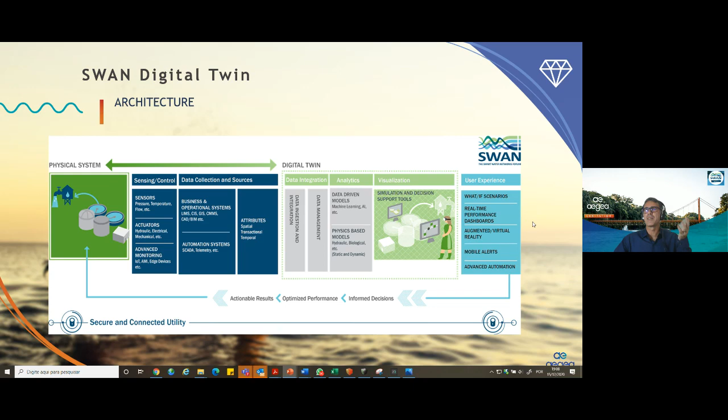You see this in a practical vision of our facility. Data integration as well, it's so important. Analytics, asset information that can offer better results in optimization, organization, for user experience in a virtual world, augmented reality as well.

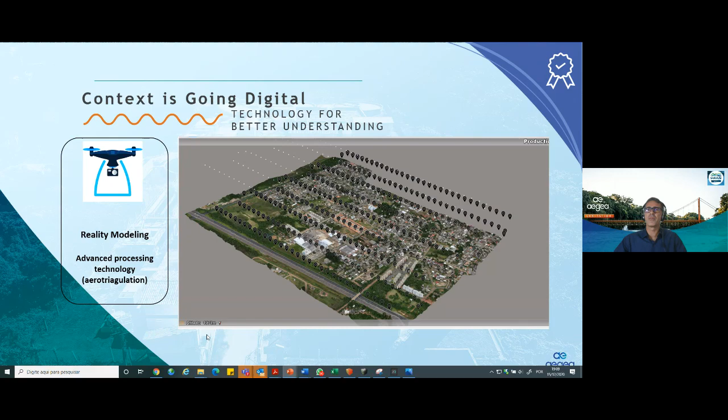So the context, how to digitalize the context, the physical assets, the sites. In this part, I'd like to highlight that we are using advanced drones and processing technologies. These are just an example of one of our sites. It's amazing the color, the details that we can capture using this high resolution data and images, and we generate these 3D models.

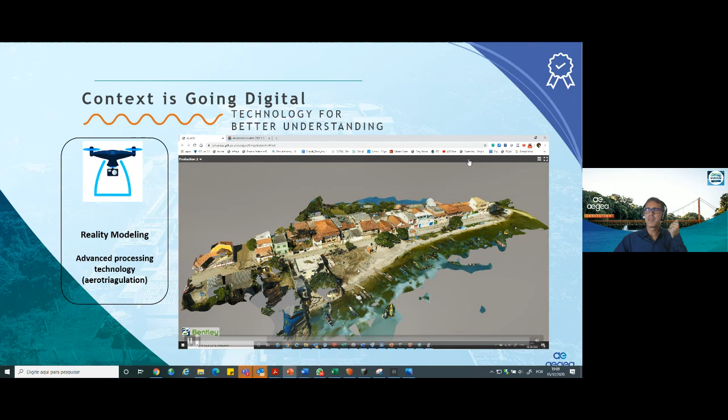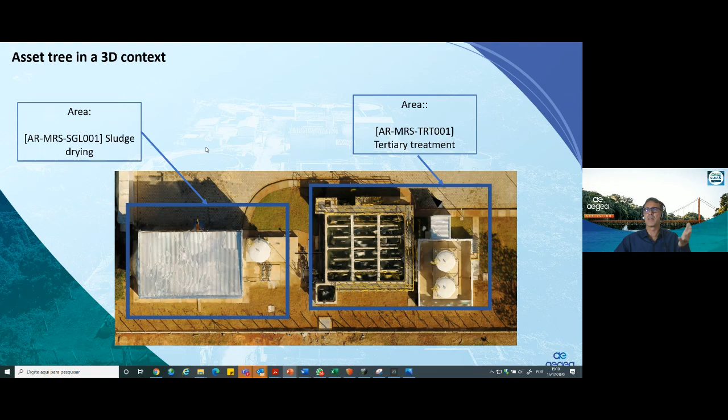The asset tree in this context, how we organize our organization, the information requirements in our organization at different levels of this tree, from the plant. In this context, we split into areas from different functions: sludge drying, tertiary treatment, till the equipment. And it's amazing to see the attributes, the volume, the historical data, the condition of each asset.

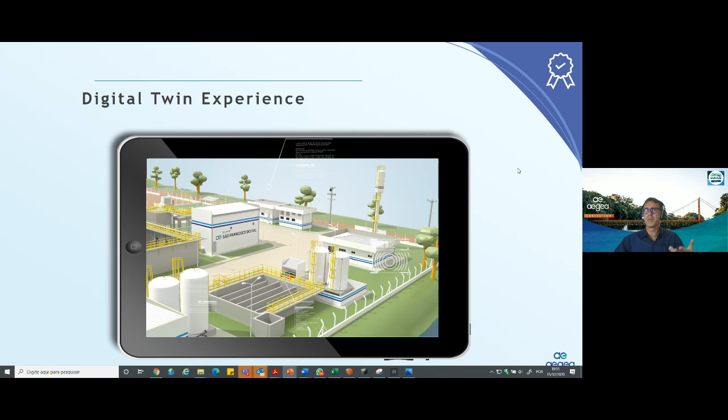In this amazing context, combining BIM, Building Information Modeling, and DT, Digital Twin, it's amazing that this cross-platform we are able to use even in the field, the iPads, to see the data. And in this part I just show you the technology that we use in this particular plant.

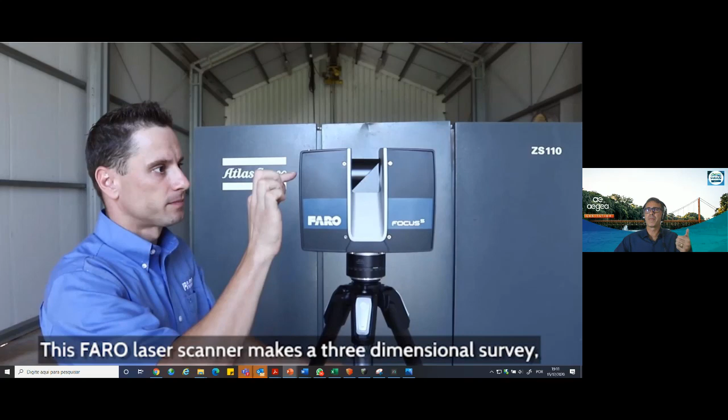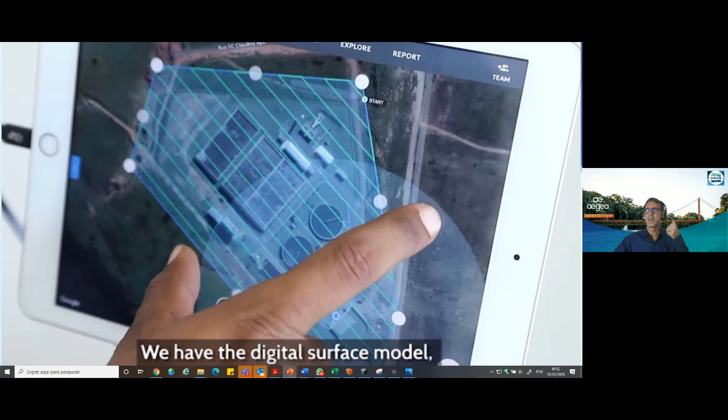The information will be accessible for anyone, anywhere. We use laser scanning to capture millions of points per minute to do this survey. We have a wealth of information to take to the software. We capture the digital surface model, the digital assets, we can digitalize our assets as well. The principles of topography, aerophotogrammetry are used as well.

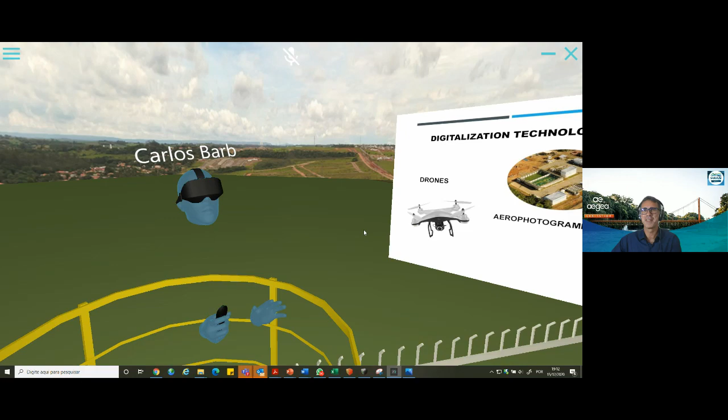So let's go to the field. Let me introduce you to our colleagues. Carlos, can you see me? Now we are inside the plant. Hi, how are you guys? I'm here. Perfect, Carlos is the CEO of the EXA project. Carlos? Yes, okay, it's my pleasure to be here with you guys. I just lost tracking of one of my hands, but no problem.

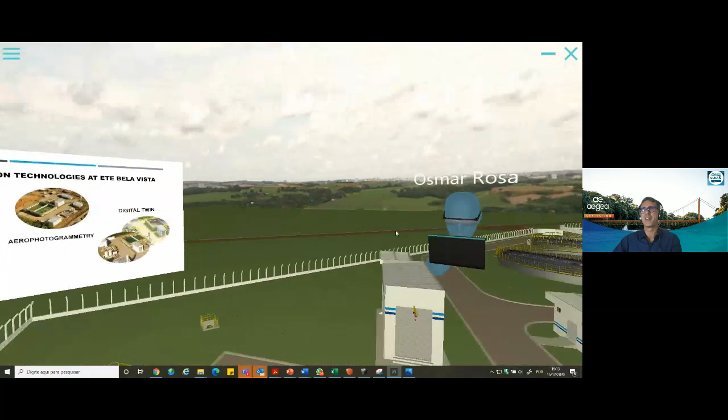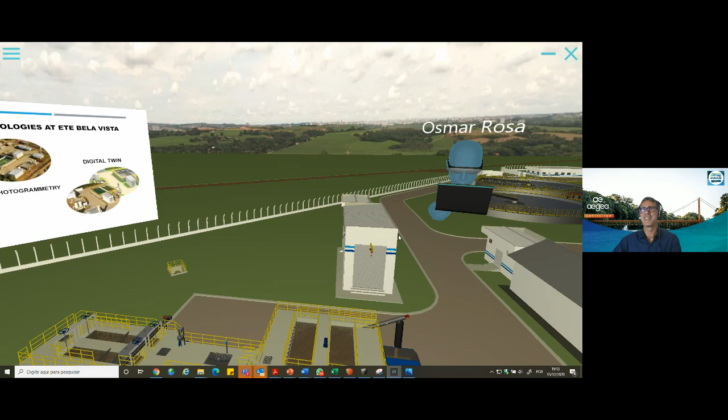Let's go ahead. And our colleague Osmar is my colleague in Aegea, is part of this team. Osmar, can you hear us? Yeah, I hear. Wow, perfect, Osmar.

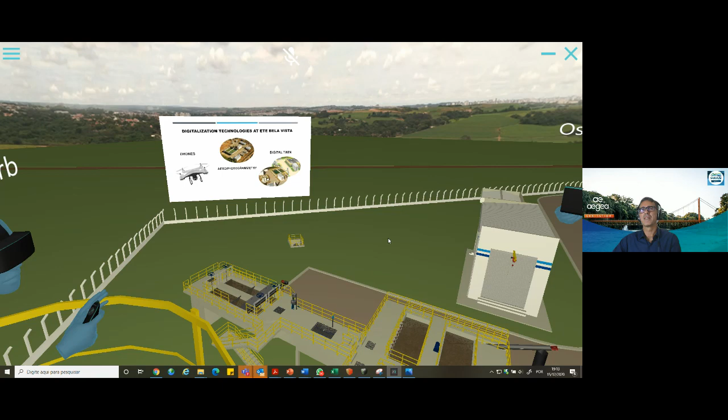It's important to mention that we can do it later if anyone can, we can offer this opportunity. So, but if people had the VR glasses, they could have downloaded the app, and then they could be here as an avatar, just like Carlos is now, touring this site. Brilliant.

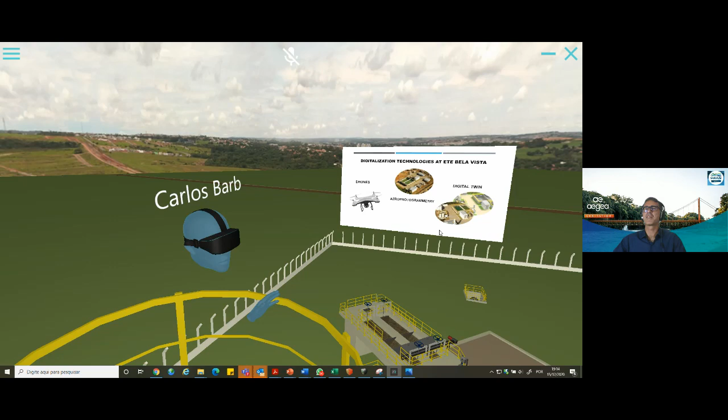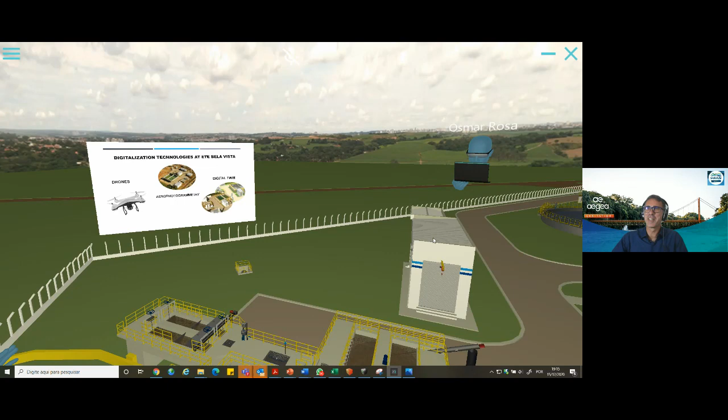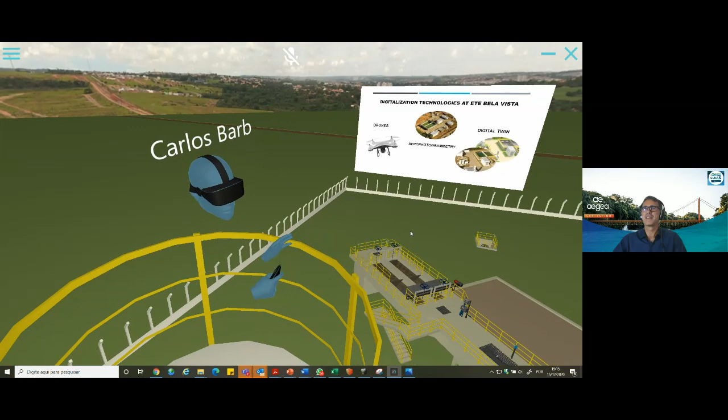Wow, it's great to hear that everybody outside can see us. This vision from the tank is amazing. I'm using the notebook, and Carlos is using the VR glass. For Carlos, the immersive experience is even more real, it's a lot better. And it's worth mentioning that anyone with an iPad could also be sharing the experience with us, even on the actual site, at the wastewater treatment plant.

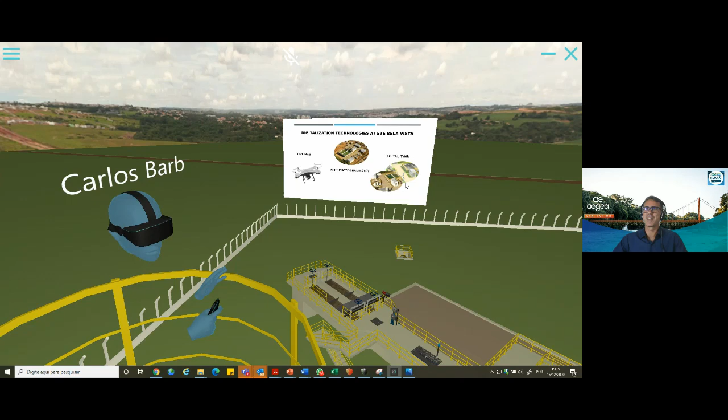This pop-up, I just want to highlight for those not so familiar with digital twin, is the replica in detail of our plant. If you go to the plant right now, you'd see this exact view.

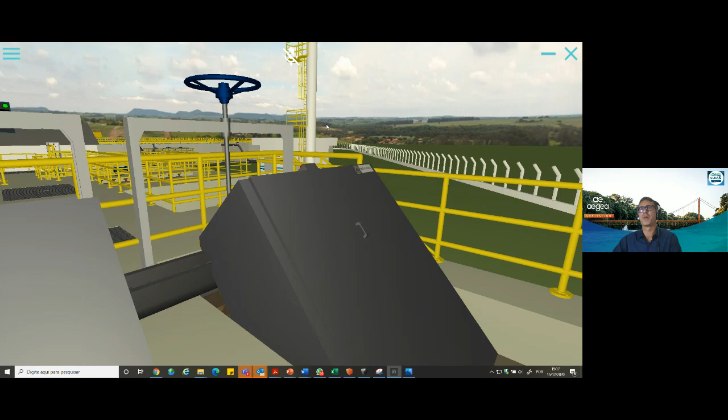So let's begin with the preliminary treatment. Cadu and Osmar are here with me, we are beginning our tour. Everyone can see we have tags on our equipment because over the last 3 years we've been managing these equipment based on the QR code and the historical data, asset information, and verification. All the historical information you can see here - when we bought it, how much it cost, how we installed it - many kinds and types of attributes are correlated with this equipment.

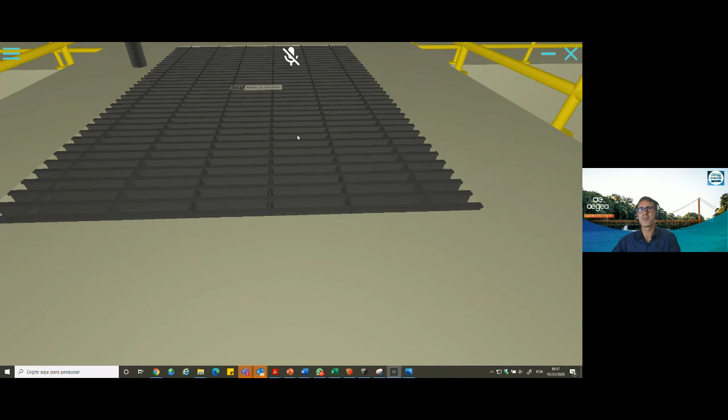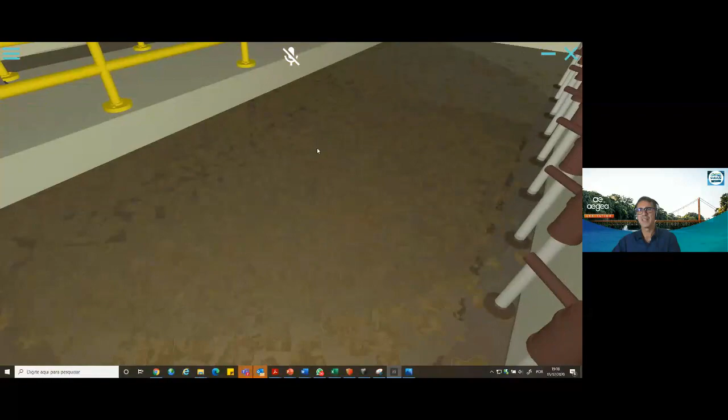Let's go to this part - we can see the flow, the real-time flow. It's communicating with our SCADA. Right now it's the flow that we are receiving in this plant. It's amazing because we don't have limits, no restrictions. We can even see the animation of the raw sewage. It's very interesting because in a physical, in-person visit, you cannot have this kind of view under the preliminary treatments or the effluent.

Even the grit removal system, as Marco said, it's impossible to have this kind of experience in the real world. I can guarantee that it's safer here. Yeah, for sure.

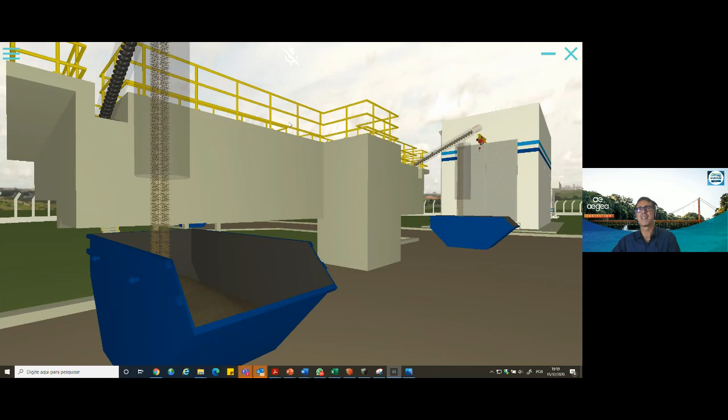So Wagner, it's Piers here again. We're getting a couple of questions which I know you can't see because you're on the screen. Are you okay with me throwing them out to you as you do the tour, or would you prefer to wait for the end? Sorry Piers, can you repeat? I was saying we're getting a couple of questions - would you like me to ask them now, or wait till the end, what would you prefer? Well, I think it's okay to answer now, it's more friendly. Yeah, that's what I thought, I just wanted to check.

So the first question that's coming is: is the QR code tag metal or a plastic label? This is looking at - you've got this asset register of data and where you're reading that data from - is it a metal tag or plastic? Metal. In Portuguese we say inox - stainless steel.

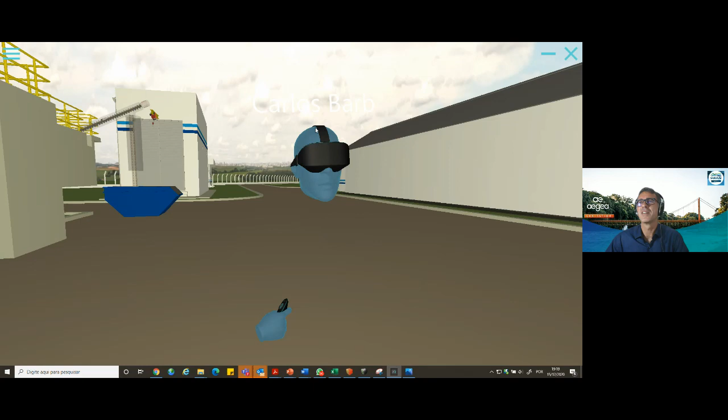There's a technical question - we'll knock all of these off while we're doing this. What VR compatibility does this have? The person who's asked that has got a Quest 2 and an HTC Vive at their disposal - would either of those work with this? Yes, HTC Vive is okay, but right now the Quest is under development. Even HoloLens is under development, but it's a matter of maybe a couple of weeks - we're porting to Quest, because it's more portable. Quest is a very good device.

Brilliant, all right. And then two sort of broader questions. One is, what was the main driver for investing in this - what was the investment thesis for Aegea to create this digital twin? And then I'd also like to ask a question around simulations - you've created this virtual sewage treatment plant, can you run simulations on it, or what degree of simulations can you do with this? Can you just change flow, or can you change wastewater strength for example? So two questions there - sorry, I'll do the one. What was the main driver for investing in creating this digital environment?

Well, the main driver was, after we increased our maturity level in asset management, the trigger was our Building Information Modeling methodology joined with our asset management guideline over the last 3 years. Now we are increasing our reliability to create this environment and explore the benefits. The main driving was for training, to support our operation and maintenance team, and even for presentations. Over the pandemic, over the last 6 months, we are even exploring meetings inside this environment.

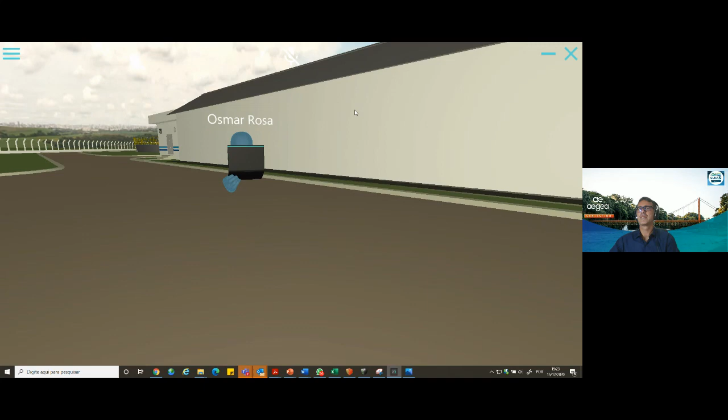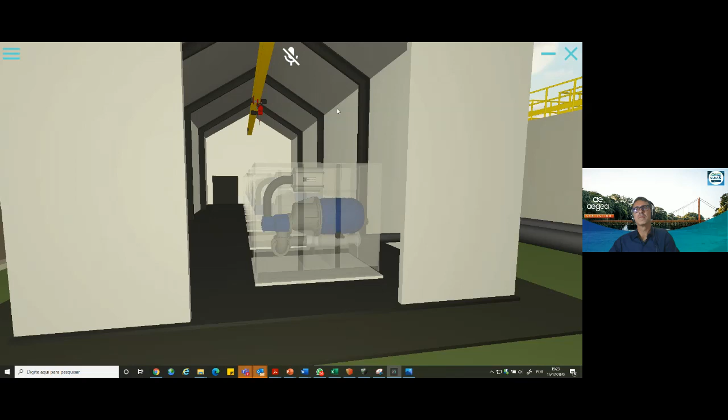And we have a long time of historical data that you can use, for example, to make prediction and simulation for a specific machine, like a centrifuge or a blower. For the process itself, you're talking about process data, and we are developing a mathematical model with AI to have the correlation between all process data itself, which is parallel to the data you're having here, the data from a machine.

We can make prediction and simulation of this specific machine, but for the entire process we are developing it further. For example, changing not only the flow of the plant but also the quality of the raw wastewater, and see what is going to happen, creating as many scenarios as you need. But I'm referring to the process - for machines, you can make predictions and simulations, and it helps a lot for operation and maintenance.

If I can summarize a little bit, they're getting this massive amount of data and processing it, and I think this platform is a great way to visualize that. It's a lot more ergonomic than seeing the data flowing on charts. So in here, the data is spatially distributed - I think it's a revolution in terms of ergonomics.

Yeah, no, it looks brilliant. And the question that Peter Williams raised, he built on it saying - I think it was from Peter Williams - can you model the impact of rainfall? But based on your answer, absolutely, it sounds like you can, as long as you've got the right meteorological data, you can make adjustments to the flow coming in.

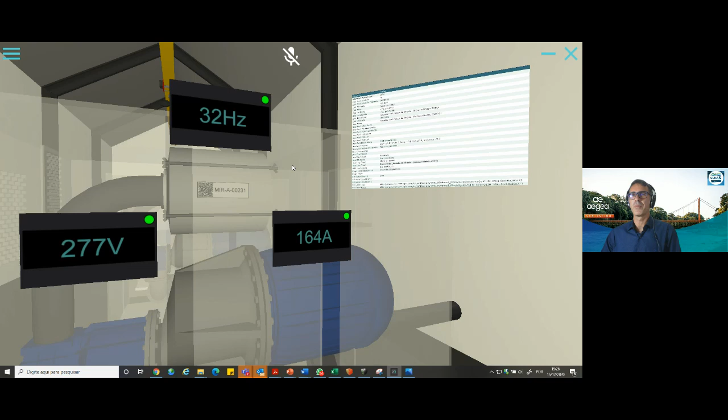Well, absolutely great questions, I'm very happy to hear that. Yeah, it appears fantastic, but I'd like to highlight that this platform doesn't compete with other specialist platforms for hydraulic simulation or rainfall modeling. In this interface, in this environment, we can see in an ergonomic way, have this more ergonomic visualization. Cadu, Osmar and Marco talked about the historical data, real-time data, and even simulation data - we can gather all these perspectives, different disciplines, in the same environment.

Yes, for sure, and also the predictions can trigger, for instance, a maintenance process. So beforehand, we can have a maintenance process that can help people create maintenance on the machine before anything really catastrophic happens. This is very important also, to keep the health of our assets.

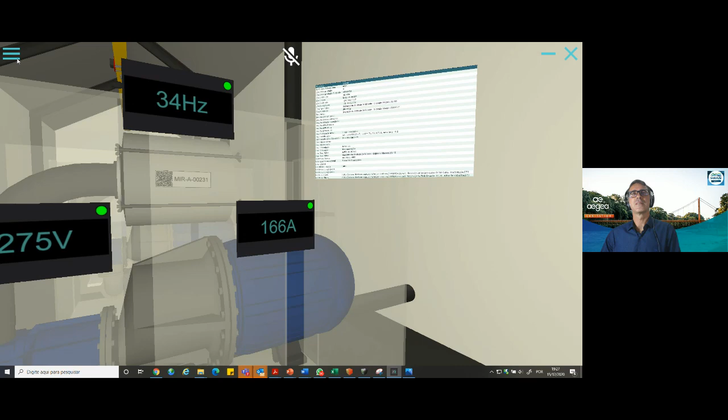Well, like you say, the tool was developed so that you could do better asset planning and better asset management. So again, another interesting question around greenhouse gas emissions. Obviously a wastewater treatment plant is a source of immense amounts of greenhouse gas emissions, both from the secondary treatment plants and from the sludge treatment end. Does your model at the moment look at that, or is it mostly focused on treatment and hydraulics? Or do you measure the GHG emissions?

Oh, the next step, yeah Piers, yeah, we can join this perspective. Fantastic question - imagine correlating this kind of data, this information, with the operation vision, with the operation perspectives, it will be amazing. Yeah, we already have some interaction about these advancements, yeah, towards this circular economy.

Yeah, this part is fantastic. We have some videos - I will not put this video in, but we have some video that we can offer for our team to see how this process works.

Just yesterday you made a very interesting test with Osmar. Osmar had the virtual machine on his table and could see through a tablet, could show it - it was a very interesting experience. And you discussed the blower. Yeah, this graphical data, this graphical 3D environment, is even available for our team inside the plant. Now we are seeing the avatar - imagine that in our plant.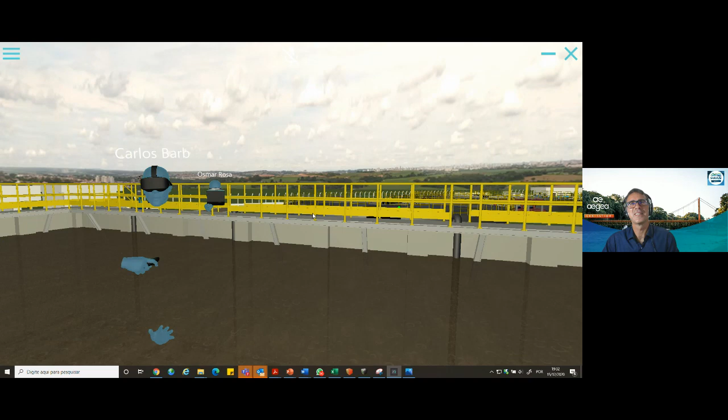We've got a couple of questions, which again I'm going to read because I know you can't see them, Wagner. From Rhett in Yarra Valley in Australia - good morning, Rhett. He's asked the question: how did you balance the challenge between investing money to make the visuals more detailed and realistic versus wanting to have an operationally useful tool? There's this fine balance, I guess, as to where you spend your development dollars. Maybe that's a question for you, Carlos.

That's a beautiful question, because right now we use a platform, okay? So you can import the models, okay? And you have also lots of tools to create the digital environment, so no need for coding, okay? It's a timeline - you work with the timeline, you start to stack up, how can I say, actions or animations. And everything you see here comes out from this platform. So it's quite cheap, actually, the digital visualization, okay?

The most important thing is the tremendous amount of work that the guys put on scanning the site, collecting the data, analyzing the data. But right now, XR Project is a platform, so it's a lot easier than you might think. Brilliant.

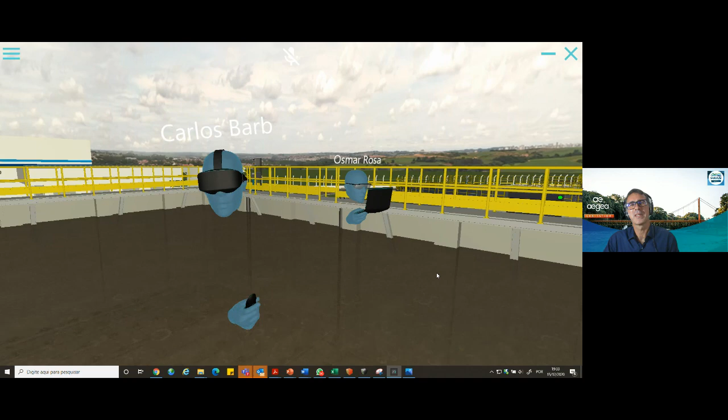Just to talk about the strategy - this project, we are not seeing the economic feasibility because it's a POC, a proof of concept that we are trying. The idea is next steps will be able to, for example, have the best concentration of oxygen for the wastewater at the entrance of the wastewater treatment plant. It can, in another step, be used in automation, and in another step for making a complete autonomous operation. It's step by step you are advancing, and it's a proof of concept. For us, we are not seeing the economical feasibility in this specific case.

Yeah, okay, I get that.

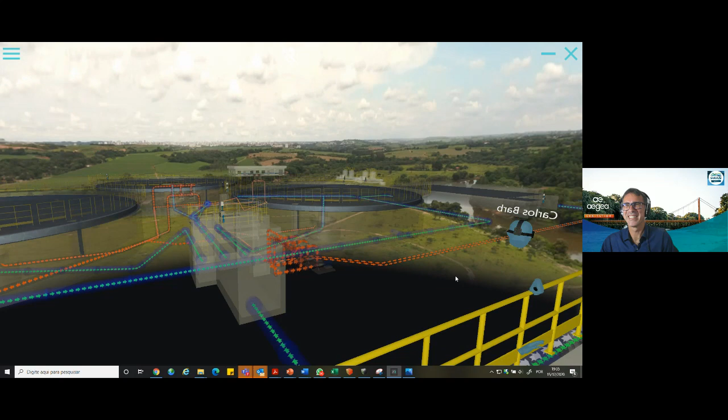A few more questions. We're going from Rhett, having breakfast in Melbourne, to Peter Williams, having lunch in California. I'll do the easy question first: can you superimpose maintenance instructions on each image for each asset? We will show this part in the decanter centrifuge.

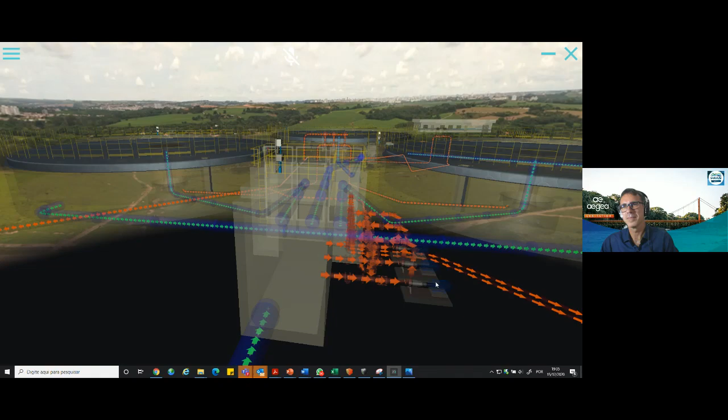Fantastic question, we will see the tasks in detail. Good question, because... as it's a cross-platform environment, people can use augmented reality to overlay the digital environment on top of the real machine. So it's an excellent way to do training and show processes, understanding the machine, without putting the trainee or the machine in danger. It's a very good question, one of the best benefits of this kind of system.

Now there's another question which seems to have been flicked off my database, but it came around: where's the data stored? And if you can answer the cybersecurity question at the same time, I think there's a cybersecurity and data storage question that will be of interest to people. Carlos, is that one for you to answer?

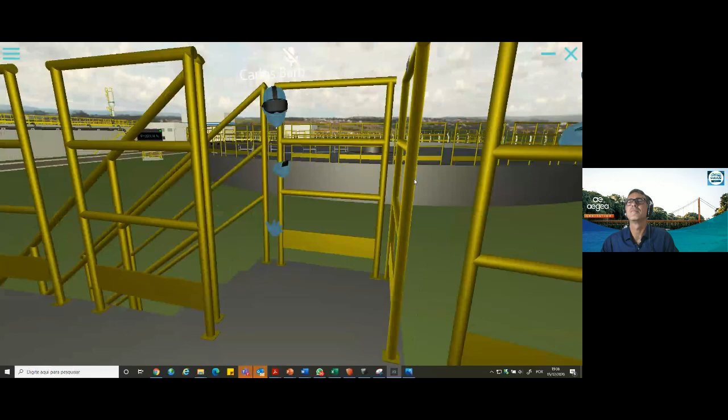Yes. First of all, every machine has an instance of this geometry. It's not encrypted, but it's not the actual 3D model - it's an executable, a closed executable, so it's not exposed to the user. This is the first thing you must understand. So every machine has an instance of this plant, this digital environment. The only thing that goes through the internet is our voice and positions, and even our voice is encrypted. So there's no use if you intercept any message - it's voice, encrypted voice, and no geometry goes through the internet. I don't know if that explains a little bit about the security.

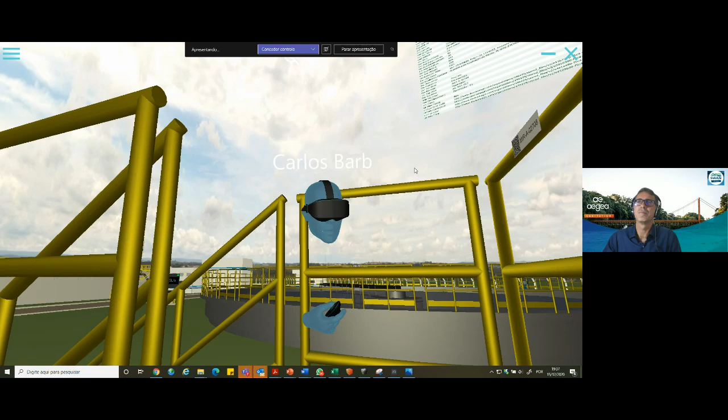We also have a middleware that is capturing the data from the data bank of any company and feeding this geometry. But this middleware is always running on a server on the intranet of each company, so it's very, very secure in those terms.

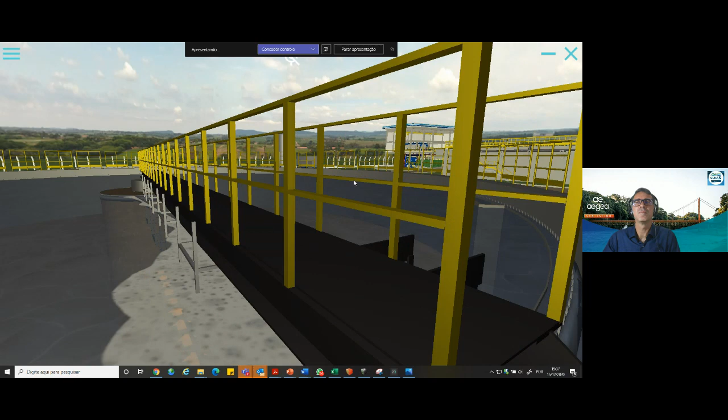Excellent. So there's now a big question we should pause around, which is: which platform? The question was only two words, but I think it's a useful point to pause and Carlos, to talk about who you are and your relationship with Aegea, and your thoughts around how you might work with other utilities should they want to emulate and copy this approach. So can you start by answering which platform - the XR Proj one - but can you delve into that first?

Yes, for sure. We started with Industry 4.0, more precisely training. We developed a partnership with Aegea to use this digital environment for showing the data in the sewage and water treatment. Right now we are happy to announce that other companies which would like to develop along with us, together with us, we will happily share the technology and also share the costs. I think people are going to be amazed that this platform is easy to use, but only if we make partnerships with Aegea - this is really important in water treatment.

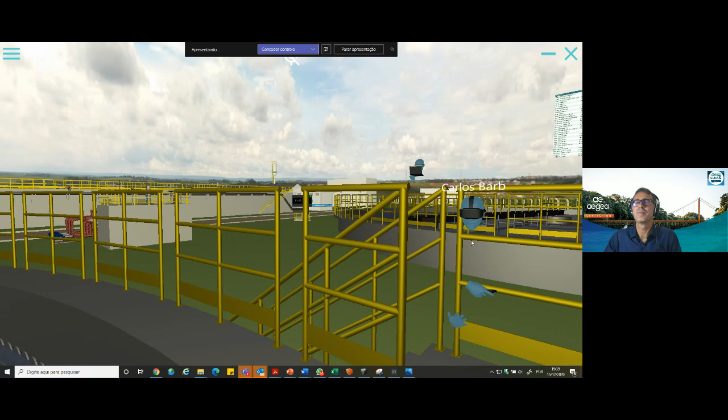Now, let's go back to breakfast in Melbourne, because Kevin Heath from City West Water has asked: is the treatment plant physically manned or is the plant monitored remotely? I would think there are still physical activities that would require operators to attend sites, such as taking samples and cleaning the physical sensors.

Wagner: Yeah, we have physical operation as well, and this platform is helping a lot to support this team inside this environment. Great question. In the next steps, as Marco said, with the artificial intelligence and automation that we are advancing, we will be more comfortable to operate most of these remotely.

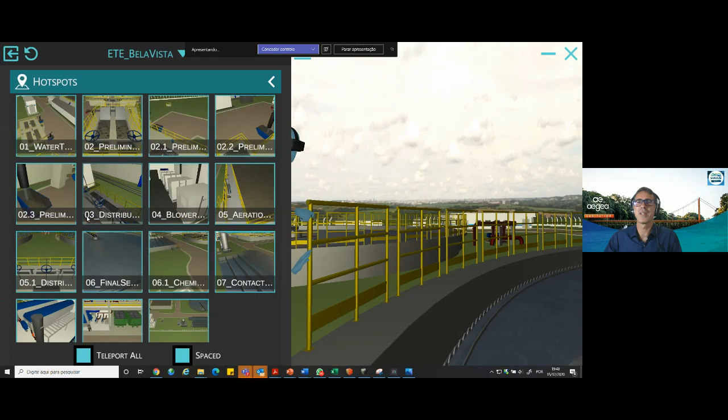Yes, and it's important to note also that in the future we can have bidirectionality - the digital environment will be able to send commands to the real platform. Yeah, I'd like to go to the centrifuge.

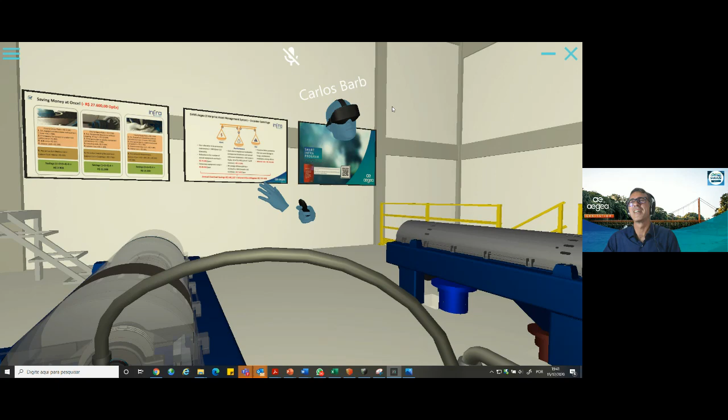Wagner, there's something interesting. There's another guy with a VR glass right now, which is really nice. Fantastic! We have another guest. Perfect, Brock. Wow, fantastic, Brock. Can you see the screw?

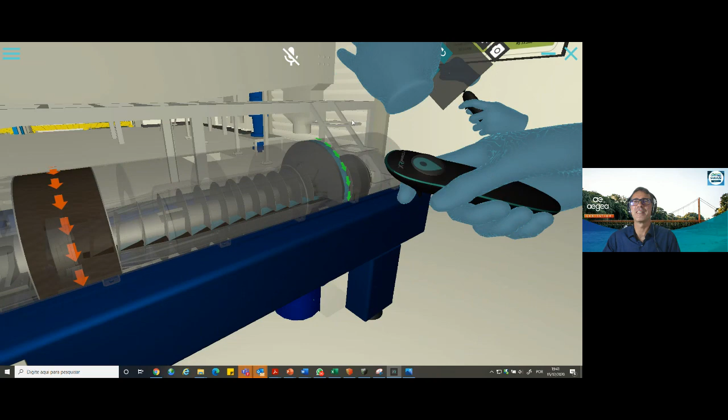This is a great example of the use of an iPad, the cross-platform feature, in which someone with an iPad can start to see inside of the machine, and also start to understand about the pieces and how to manage the maintenance process.

This is going to be very interesting. In some other clients, we could see a reduction of 40% on the maintenance process. It was beautiful, so that's a return of investment already. That's a great example, isn't it? I love it, great story.

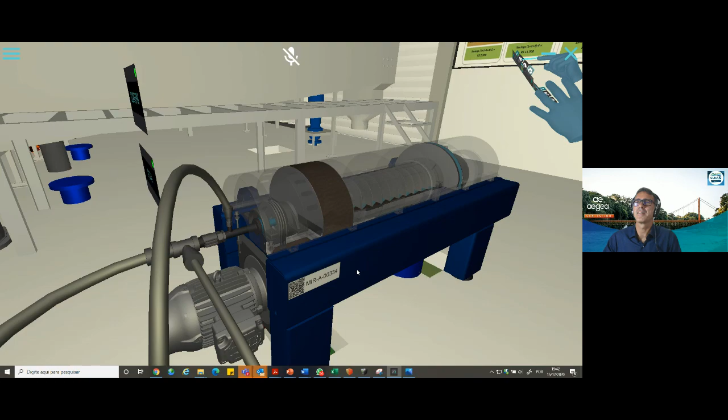Again, I'm throwing in the questions as we go around. We've done breakfast in Australia and lunch in San Francisco, now we're going to dinner in Washington with a question from DC Water: to what extent are the users, the O&M personnel, involved in development of these tools? I guess that's particularly pertinent because you seem to have one of your O&M operators in the centrifuge house with you. What extent were they involved in developing these tools?

Well, this specific centrifuge was a partnership with our supplier. We convinced them to share the piece of equipment, and we generated this model in detail with some effort on our part as well, because of the confidentiality of the equipment - yeah, some secrets.

It's worth mentioning that I have several hours of meetings with an expert on this machine on site. The nice thing right now is that this expert can give support for other plants as well, remotely, without needing to commute. This is the most beautiful thing.

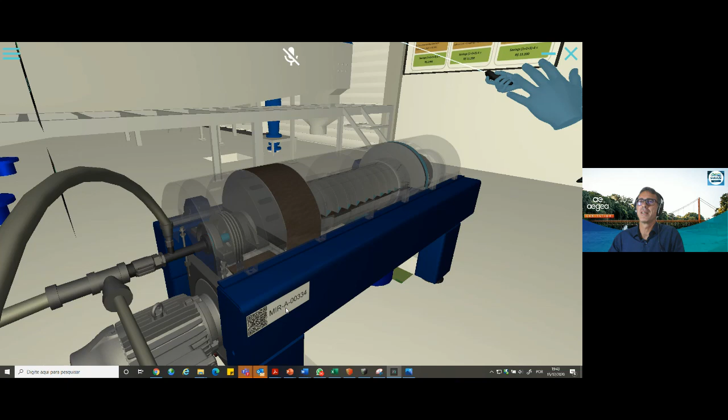I'd like to highlight the peers and everyone can see here the tag - so the human-machine interaction is controlled with the computerized maintenance system. Check in, check out with this equipment, so the human-machine interaction tracks how long they take to repair this equipment. And we know the historical data about each maintenance event, each work order, and this is quite valuable for us to keep this system working.

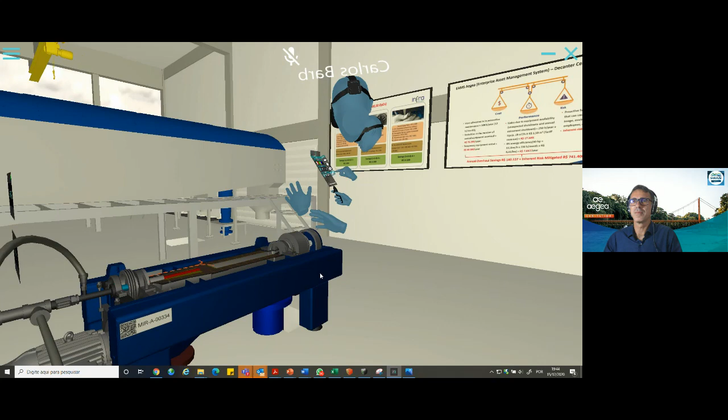While we're talking about historical data, I'll go to a question from Ben Fraser at City West Water in Melbourne: can scenarios for which there is no historical precedent be simulated? He's thinking about emergency scenarios - we've had pandemics and bushfires in the last 12 months, but also unusual spikes in influent quality. How far can you stretch the envelope to model for scenarios for which there's no historical precedent?

It's a key question - that's a tough question. We have historical data based on other platforms. For this platform, we are getting the data here, but this facility has been working over the last 7 years. So we have some historical data, but now we have more accurate data with more instrumentation in the field, and we are being able to correlate this and filter this data to make better decisions in this environment.

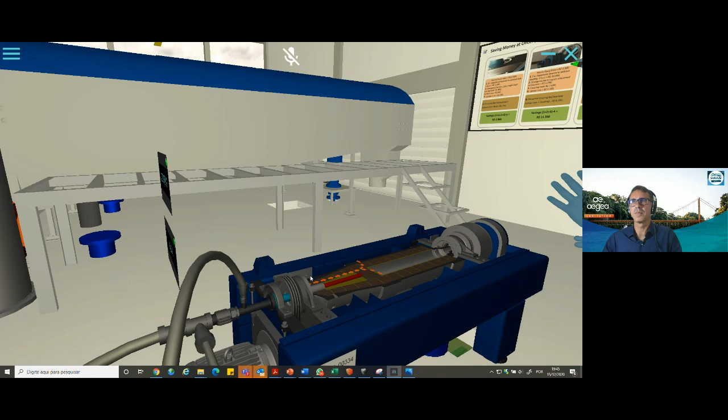It's important to know that we have the XR project that integrates many other platforms that are processing in parallel into a big centralized data lake. It's interesting that this platform integrates other platforms' data, including, for example, the intelligence we are trying to take from the centrifuge supplier.

Wow, fantastic! Our colleagues are taking pictures. Did you realize that? Take some notes. Wow, they're exploring a lot, exploring this environment.

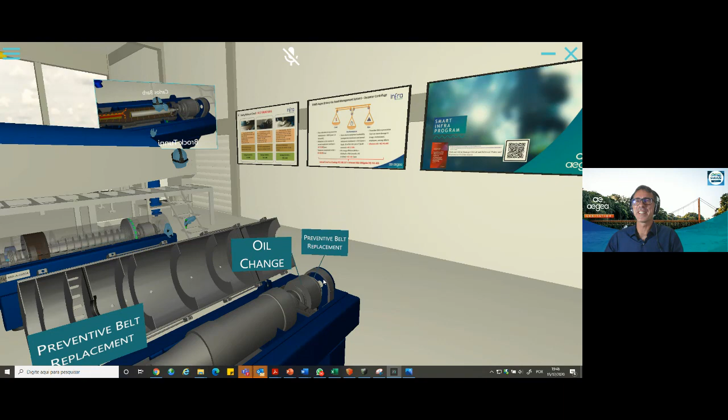So it's a preventive belt replacement, oil change - you can see the oil change instructions, and preventive belt replacement in each part of the equipment.

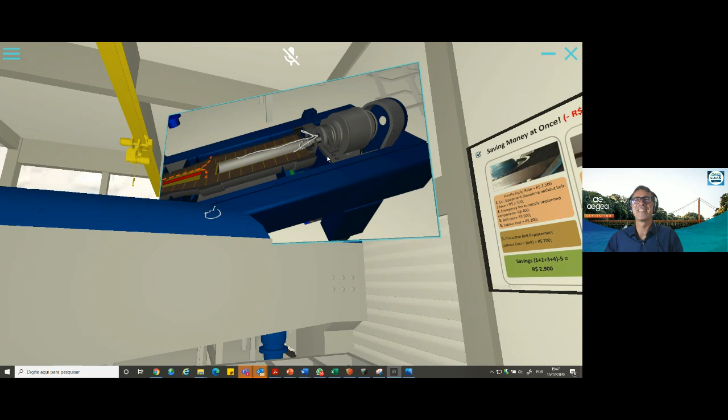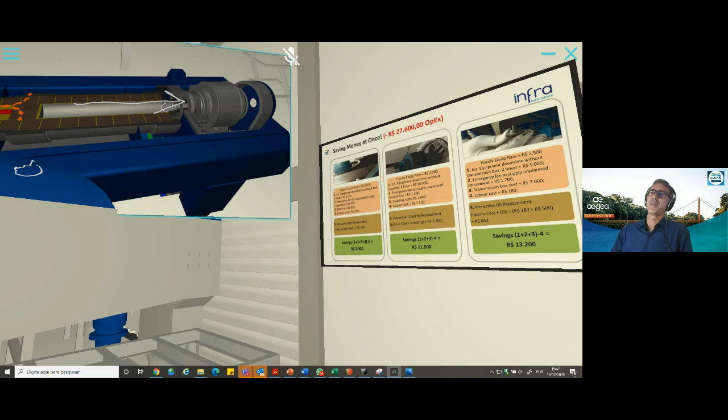So I'm assuming you'd realize Brock is a visitor, not an Aegea member of staff, which is what I'd thought at the beginning. But Brock is a member of the Water Action Platform and Water Innovation Fund member. Brock can't speak to us, can he? He's not able to communicate back to us. Well, it's just because the sound is coming from the... if I mute this microphone, maybe. That's okay, I was only going to ask if we could easily hear him.

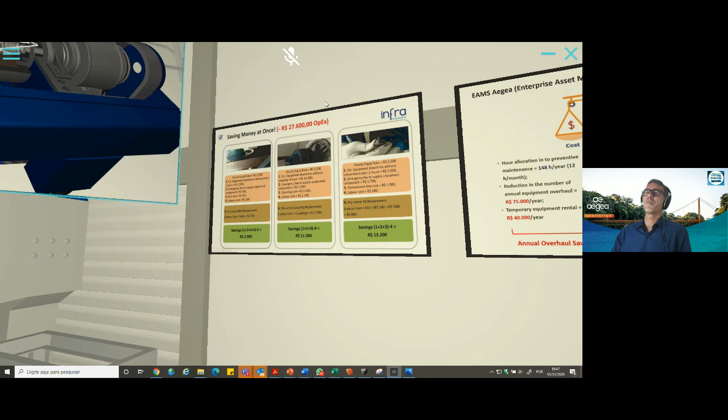It would be really interesting to get his impression. Yeah, can you say something? Maybe we cannot hear people from the audience inside the XR project. Brock, can you say something? Do you want to say something? Can you hear me? I think the sound is coming just from the meeting, not from inside the XR project. Okay, everybody's muted in the XR project. But he should be pretty much able to talk to us. Oh, for sure, yeah. Okay, no worries, all right, move on. Can you hear? Can you say something?

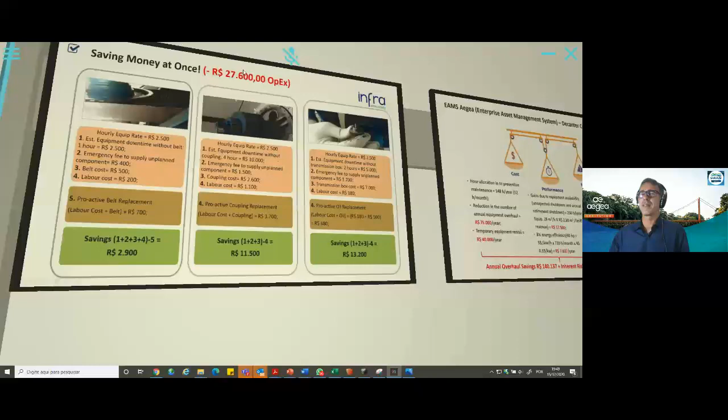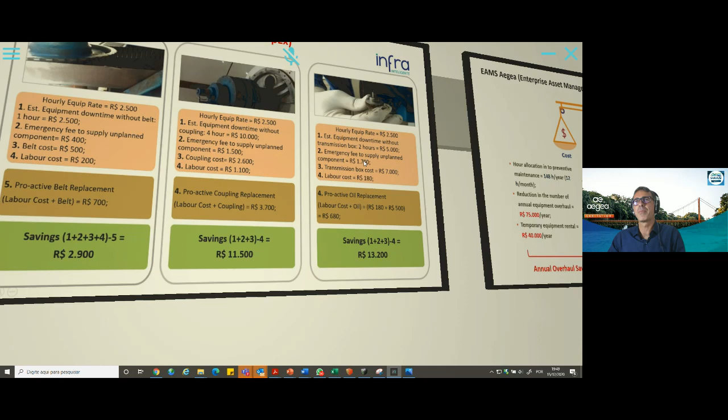Just to prove the viability of this project, it's important to highlight some financial benefits that you already seen in the intelligent smart infra program. We are saving money in proactive actions, predictive maintenance, avoiding downtime, and you can see 3 key tasks for keeping the centrifuge working well. The board benefits show one is oil replacement that avoids the transmission box breaking. So imagine that along the time, balancing the cost, performance, and risk.

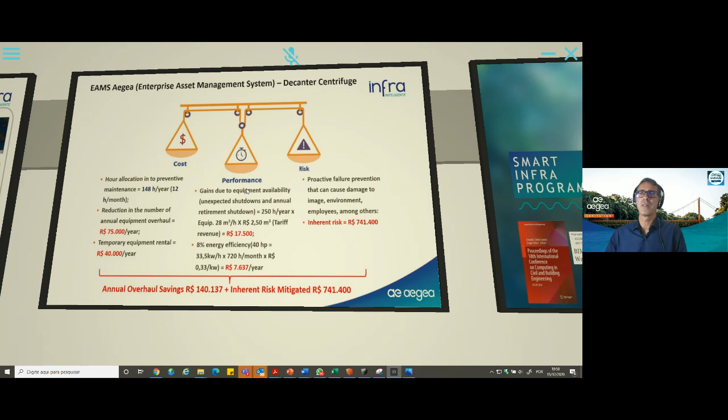We have an enterprise asset management system, and we calculate all the benefits involved in this initiative, even the gains in performance, energy efficiency, as well as preserving our image, environment, and our employees, among others. The total is almost 1 million Brazilian reais for this critical and relevant equipment. I'd like to highlight that if anyone wants to know more scientifically about how we do that, just scan this QR code. We published this paper in a big conference that involves many specialists around the world, BIM and AM to manage critical and relevant water and wastewater utilities assets.

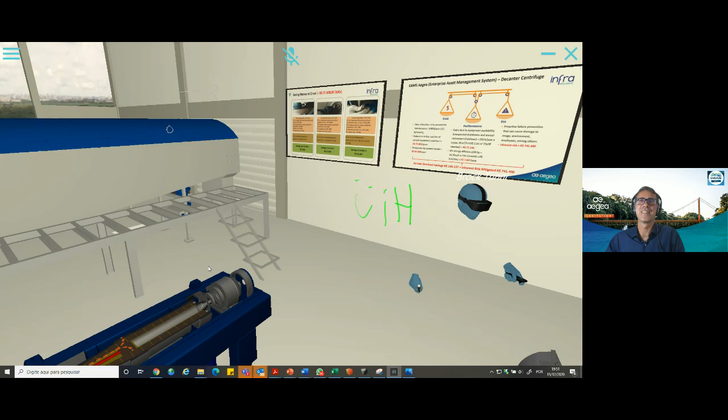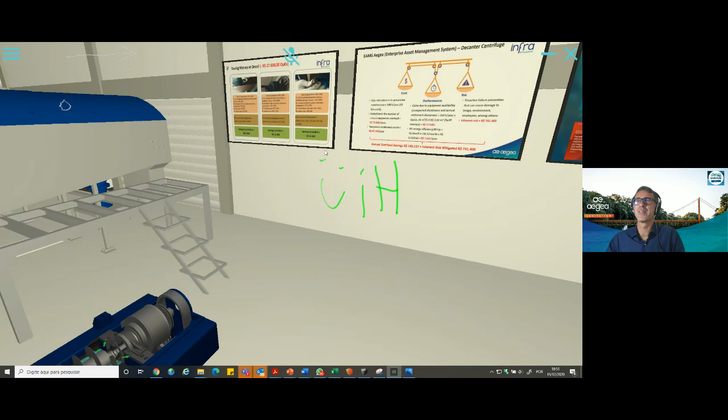I'd like to invite everyone to see the overview of this plant and even see the city. Oh yeah, I can hear you. Yeah, we can listen to you. Can you share your experience, Brock? We can't hear him. You might be able to hear him, but we can't hear him. Yeah, that's what I thought.

Well, let's just go to the other hotspot that's also amazing. This fantastic futuristic vision from our plant. You can see all this phase, the subsurface, the underground.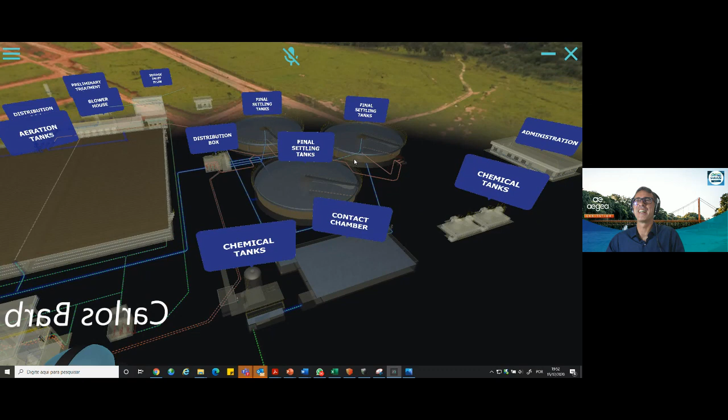Yeah, I can hear you. Yeah, for sure. Okay, I'll show you. Can you see me? I'm up to you. Okay, yeah.

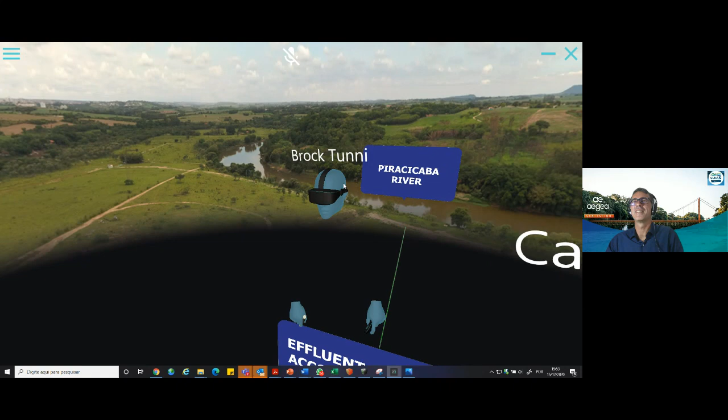Brock, what's your interaction, your immersive experience? You can see the river behind you, the Piracicaba River. You can see the environment, even the city. So Wagner, we can't hear him, but he has typed, 'This is amazing, I wish my colleagues could experience this,' which is pretty good endorsement. Wow, fantastic.

Yeah, go ahead, Wagner, go ahead. Let's go, teleport everyone. Oh, many avatars inside this environment.

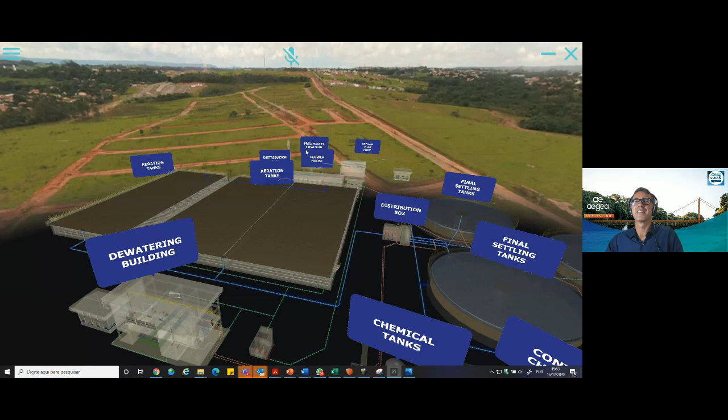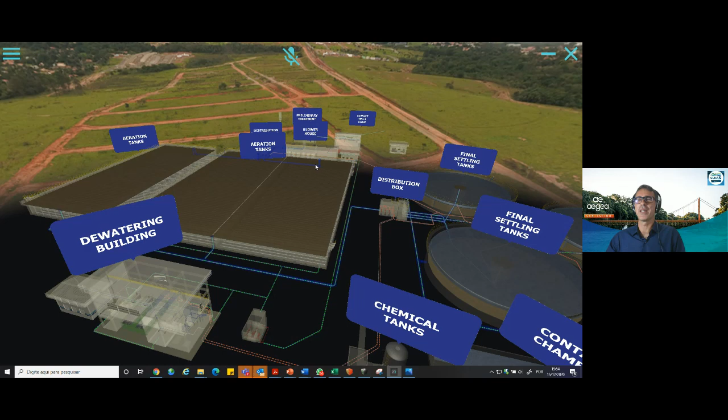Okay, we've got another question from DC Water. Were the equipment models built from scratch, or was there input from vendors? Great question. The vendors offer an object, but incomplete. We put our effort to model in details, because there are some secrets they don't want to collaborate on. So there are some suppliers that don't like to collaborate, and there are some restrictions to offer this.

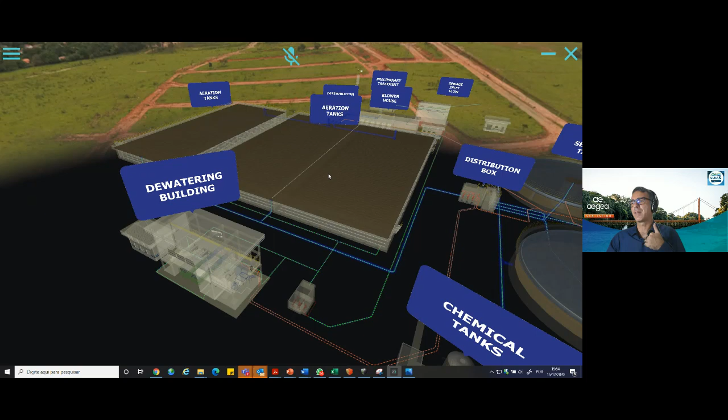But it's important to highlight that many platforms were involved in this process of building models, using a lot of Bentley solutions, Open Building, Open Plant, and many other specific CAD platforms to digitalize. Cadu, do you want to talk about that?

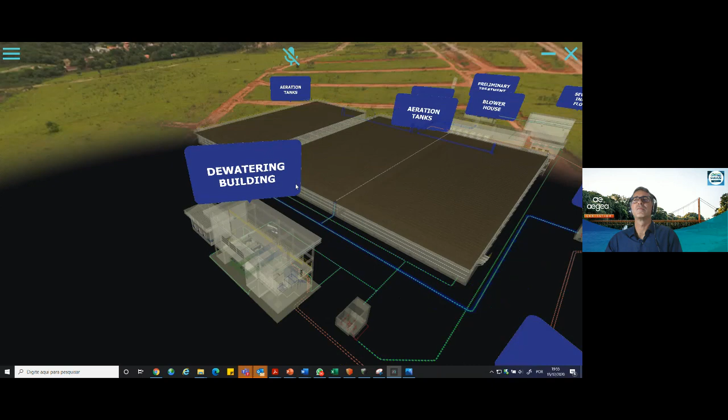Yeah, sometimes it's hard to get access to the models because suppliers don't want to expose intellectual property. But we can scan a lot of the machinery, and also the whole plant was built upon the blueprints, so it was not that hard to do. We also had the point clouds scanned from drones. So it's always a work of having to go there and model a lot of things - this is the tough part of it.

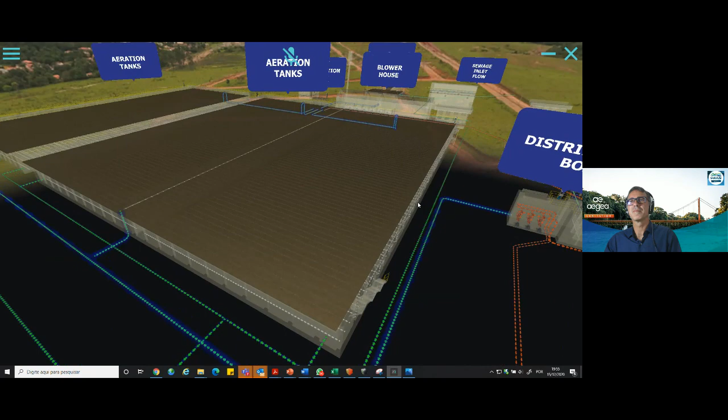Yeah, and based on interaction in the common data environment and the interoperability between different formats, there are many challenges behind that.

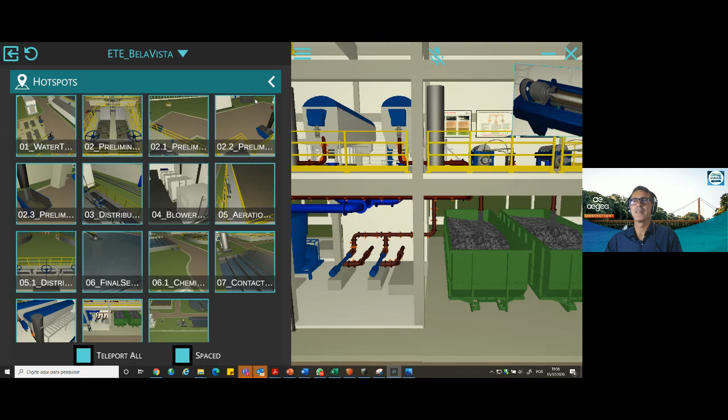Okay, yeah. And just while you're going there, we have had one question coming in about using the new LiDAR app on iPads. Yeah, that's a great question.

LiDAR nowadays is available for iPads. We are beginning to explore this one. Laser scanning is based on LiDAR, drones are based on LiDAR. That's a pretty interesting question. Many specialists are familiar with the BIM methodology, yeah, that's the cloud points based. It's a key issue for the model, for real equipment. Yeah, for the cloud points, even from a simple device like an iPad, it helps a lot in order to have precision for the model.

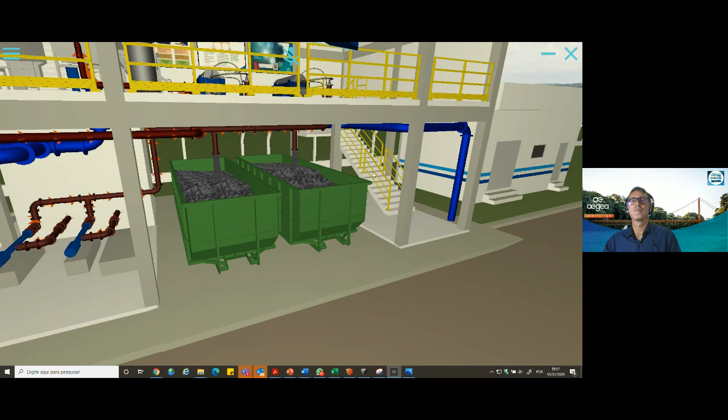So when you go to the AR solution, everything matches up. It's really interesting. Right now we use a lot of photogrammetry and some LiDAR scanning, but a simple device like an iPad, a LiDAR scan from an iPad is going to be revolutionary also. We take a lot of time sometimes correcting the position for the overlay of the AR solution, so it's a great tool, I guess.

Pretty interesting questions, we are very excited to hear that. So many possibilities, many steps ahead in this development, as Marco said, and we are even more comfortable that for this moment it will make our strategy team make better decisions for our assets, for our installations, to comprehend in detail all these phases.

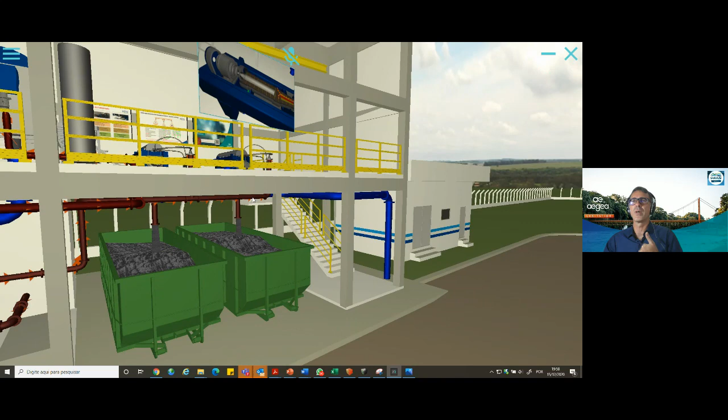It's a dynamic world, yeah, it's important to highlight that. Sometimes we need to change this component, to replace it, and we need to update this model. It's even more challenging to support all these interactions and keep this system working with reliable information.

Yeah, there is no limit to connect or interface any data, including external data, for example weather forecasts, and also AI models or platforms, you can interface without limits. Videos, streaming videos, from site, cameras, sound devices, we can record sound from the machinery and put it inside this digital environment. Again, as Marco said, there are no limits. It's very interesting, provided that you have the proper middleware.

But everything you see here in terms of animation, or schematic animation, is built up with this platform XR project, so you don't need a programmer anymore. That's something that helped a lot to have this digital environment without a lot of cost, at least on the part of the visualization.